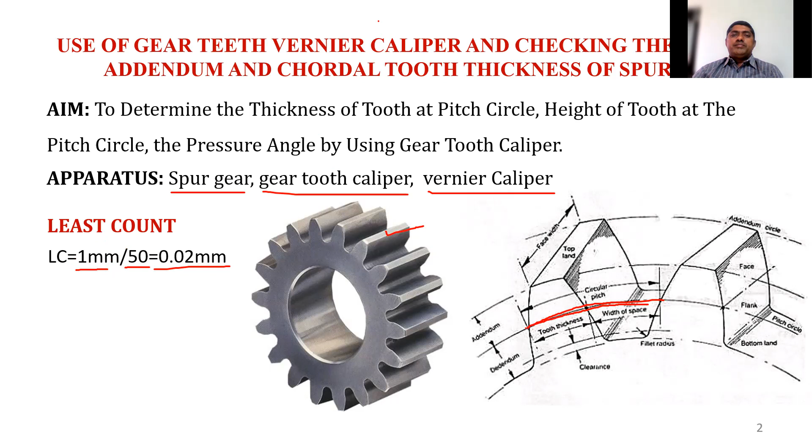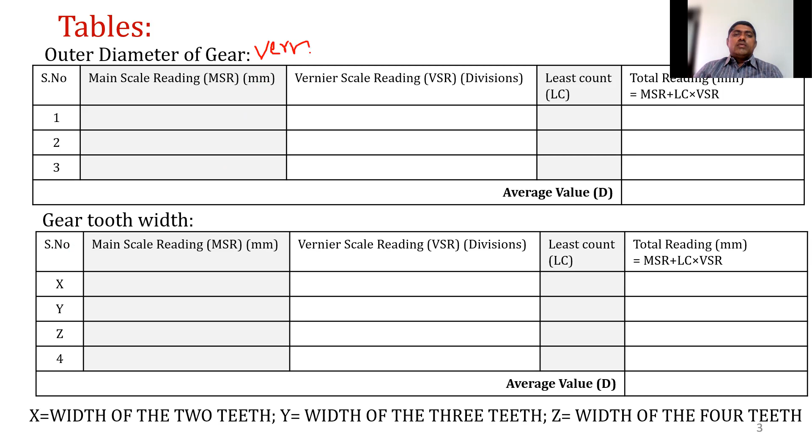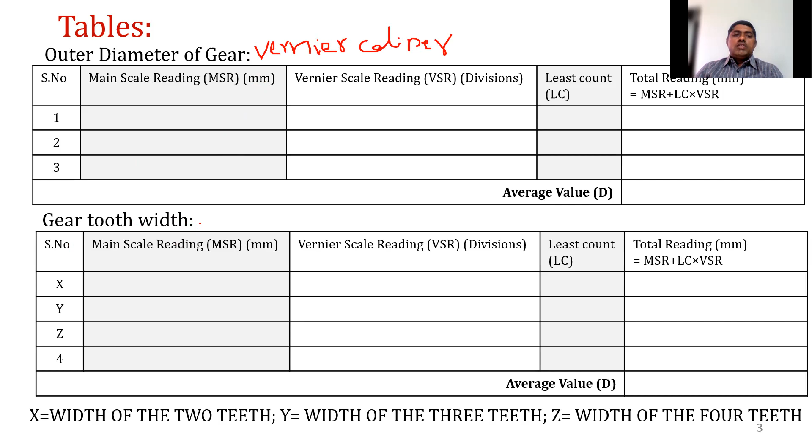So during the experiment, we need to note down the values for the outer diameter of the gear. This outer diameter of the gear is measured using the vernier caliper. And then we take the readings using the gear tooth vernier caliper for measuring the gear tooth width. So this is by gear tooth vernier.

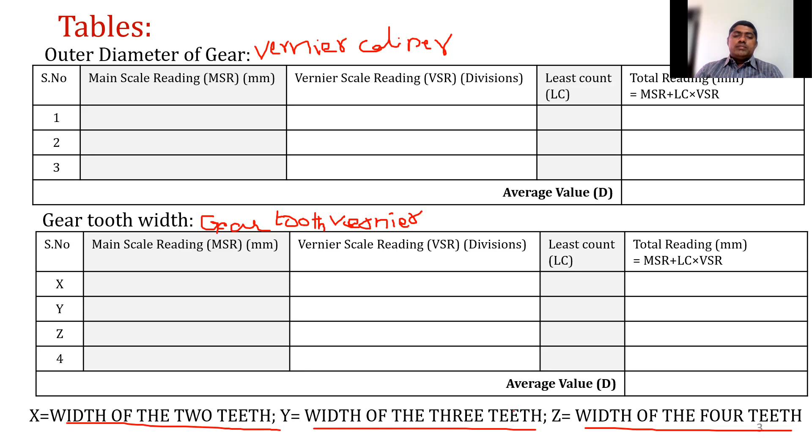So these two tables are used to measure the pressure angle of the gear. So in the gear tooth width, you can see X value, Y value and Z value. So here what is X? X is the width of 2 teeth, Y is the width of 3 teeth, Z is the width of 4 teeth. After that, we need to do the calculations for finding the module of the gear, that is outer diameter divided by n plus 2, where n is the number of teeth on the gear, and outer diameter is d.

So this number of teeth we can count on the gear, or on the gear it is printed. And we need to calculate what is base pitch. So from the second table, we have taken the measurements for X, Y and Z. By using the X, Y and Z values, we can calculate the base pitch. And then the base circle diameter is equal to number of teeth multiplied by base pitch, divided by pi.

So PB is the base pitch. Base pitch is measured at the base circle. And diametral pitch is equal to n plus 2 by d, where n is the number of teeth, d is the outer diameter of the gear. And pitch circle diameter we can calculate using n by PD, diametral pitch. So if you know the diametral pitch, by dividing the total number of teeth by the diametral pitch, you will get the pitch circle diameter.

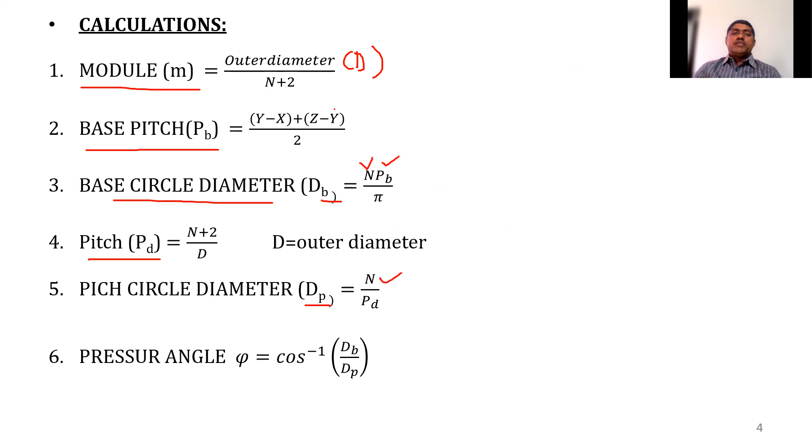Then the theoretical height of the teeth, h, that is chordal addendum. We use this formula: m into 1 plus n by 2 into 1 minus cos 90 by n, where m is the module of the gear. This is already calculated at the beginning. So this module we use here to calculate the chordal addendum, 1 plus n by 2 into 1 minus cos 90 by n.

And the chordal addendum is measured by gear tooth vernier caliper. This is the practical value of chordal addendum, and this is the theoretical value. And then we can calculate the error in measuring the chordal addendum using the same relation: practical value minus theoretical value divided by practical value multiplied by 100 gives the relative percentage.

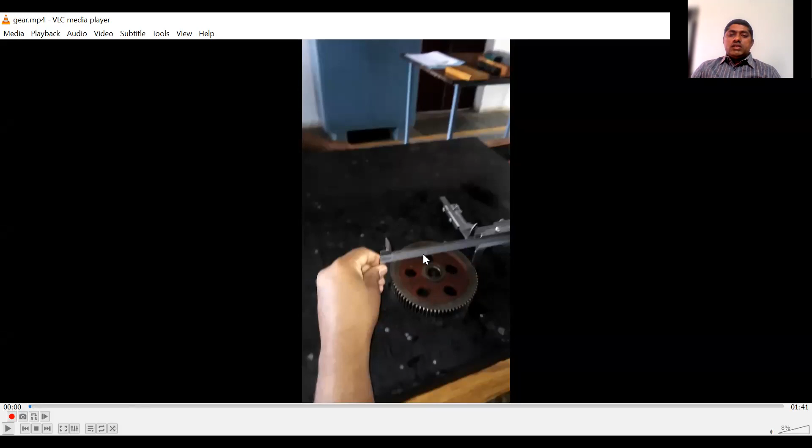Now let us see the video, how to take the outer diameter of the gear as well as the chordal tooth thickness and chordal height. For conducting the experiment, we need a gear wheel. So this is the gear wheel and this is the vernier caliper. Here you can see this is the gear tooth vernier caliper.

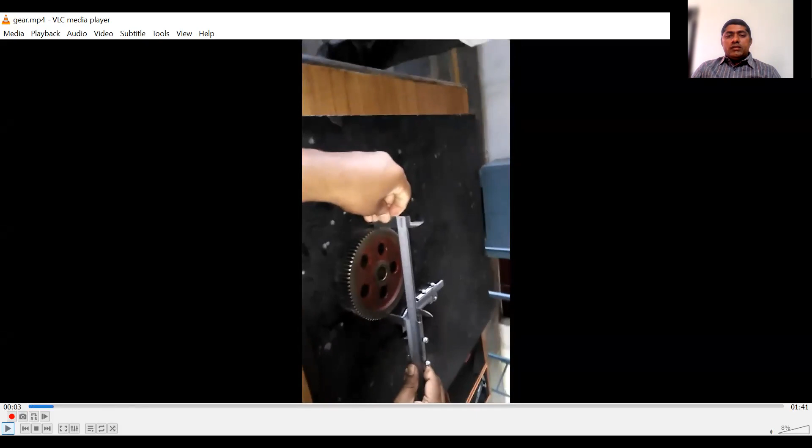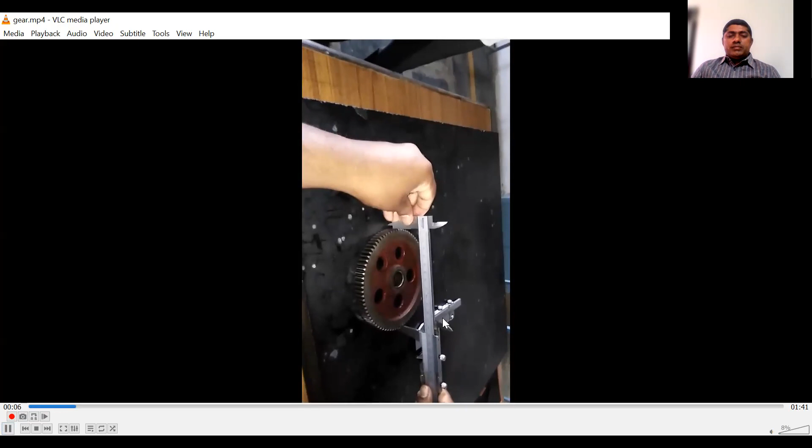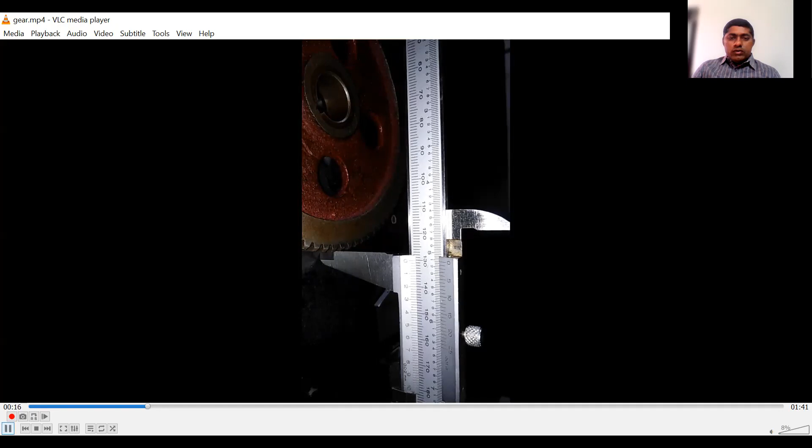For measuring the outer diameter of the gear, we use the vernier calipers. We keep the fixed jaw on one side of the gear teeth. Then the movable jaw is placed exactly opposite, on the opposite gear teeth. And then we take the measurement: the main scale reading and the vernier coincidence. Here you see the main scale is right in between 130 and 131, so the main scale reading is 130, and the vernier coincidence you can find right on the vernier scale.

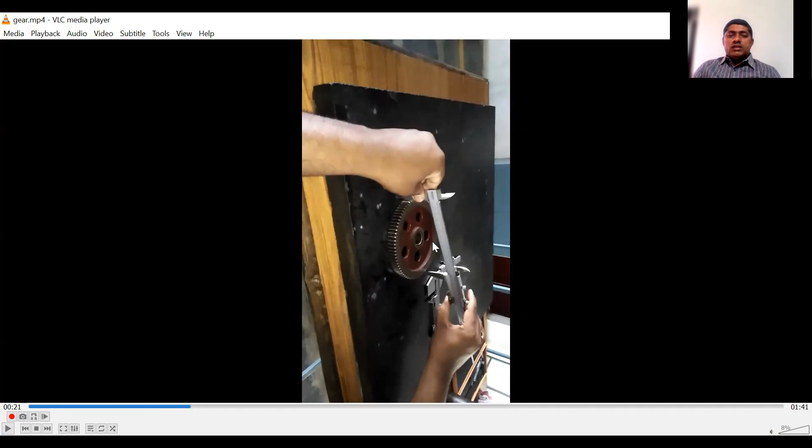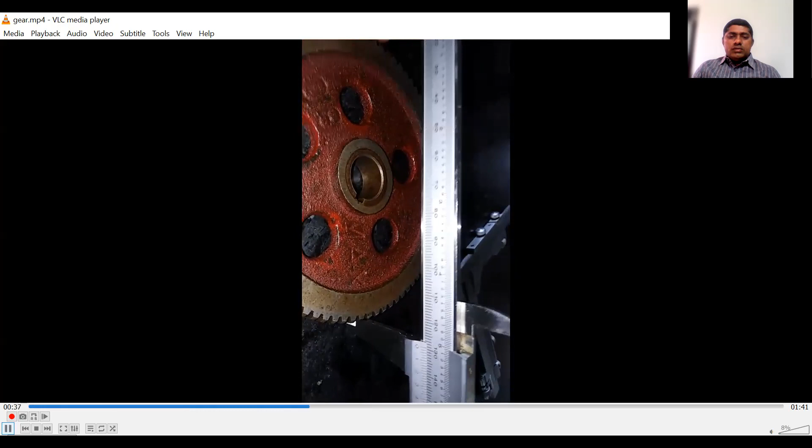And then you change the position of the vernier caliper to another position and again take the measurement. This procedure is repeated at 3 or 4 different places around the circumference of the gear. In this way we can measure the outer diameter of the gear.

So for measuring the outer diameter of the gear, we take the gear and, with the help of the vernier caliper, place the fixed jaw on one side and the movable jaw on the opposite teeth of the gear. Then we take the outer diameter of the gear, and again we change the position. Again we take the main scale reading and the vernier scale reading, and knowing the least count, you can calculate the total reading of the outer diameter of the gear.

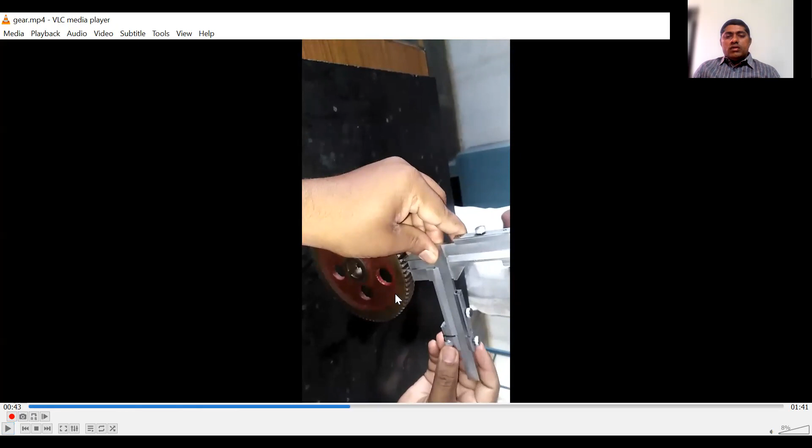Now for the second table, we need to measure the gear tooth width or thickness. For that we need to measure the X value, Y value and Z value. What is X? X is the width of two teeth. In this video you can see we have considered only two teeth. This is measured with the help of the gear tooth vernier caliper.

So we have two verniers. This is the vertical vernier and this is the horizontal vernier. The vertical vernier is used to measure the chordal depth and the horizontal vernier is used to measure the chordal tooth thickness. Here we are measuring the tooth thickness at the pitch point.

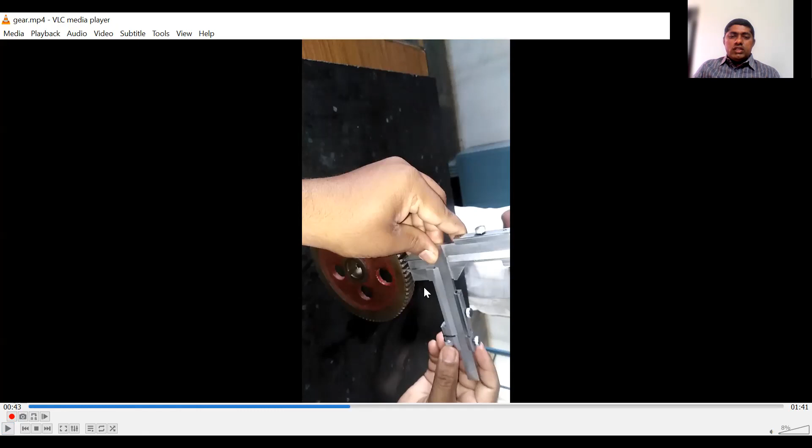In order to measure the tooth thickness, that is the X, Y and Z values, we use the horizontal vernier, because the width is changing for two teeth, three teeth and four teeth. So we use the horizontal vernier. The vertical vernier is constant.

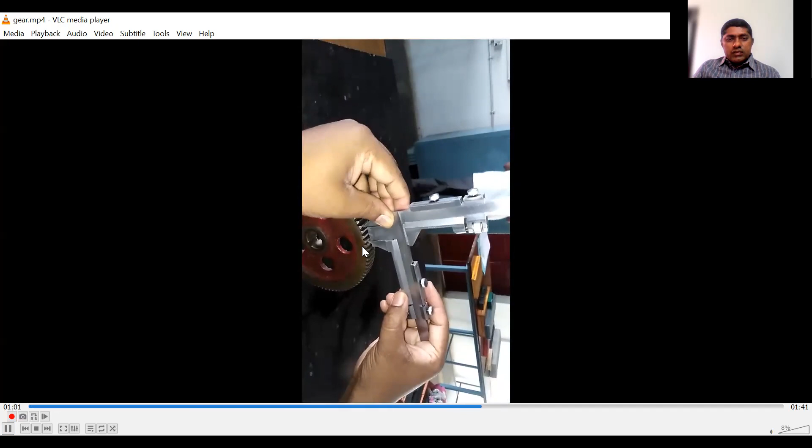Now we will change the position of the movable jaw on the third tooth. Okay, so in this case we consider only three teeth, 1, 2, 3, right? Similarly we take the measurement for the four teeth. Four teeth measurement is the Z value, three teeth measurement is the Y value, and two teeth measurement is the X value. So these X, Y and Z are used to measure the base pitch.

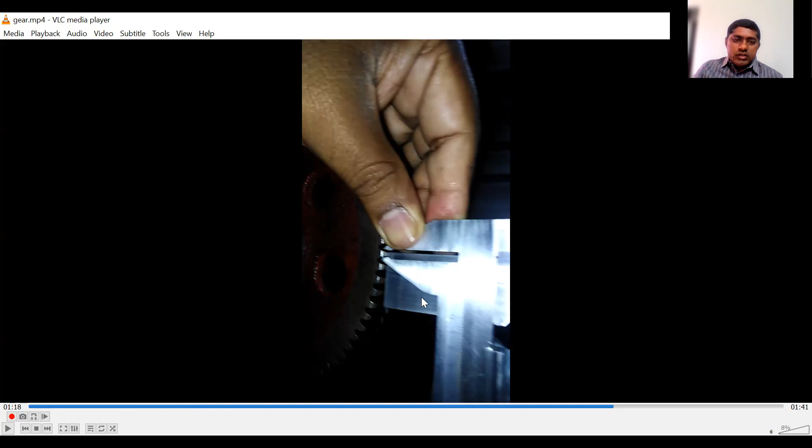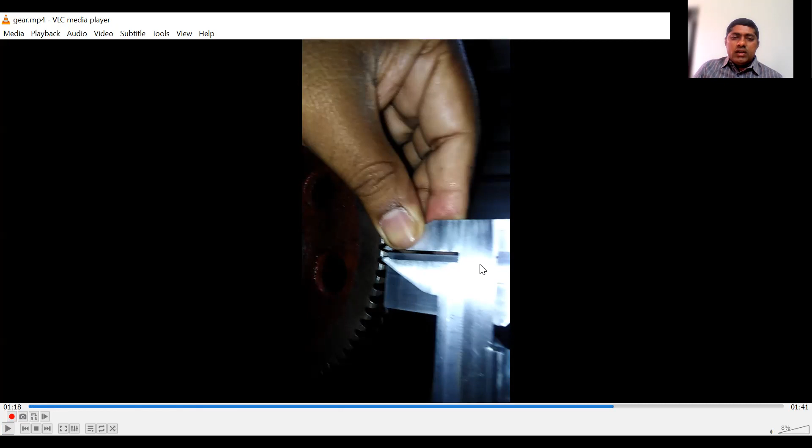And also practically we need to measure the chordal tooth thickness and chordal height. So where exactly do we measure the chordal tooth thickness or chordal height? If you observe here, exactly at this point, we need to measure. So what is the chordal tooth width and chordal addendum? For measuring the chordal addendum, you need to keep this tongue on the top of the tooth, and then you move the vernier exactly onto the pitch line.

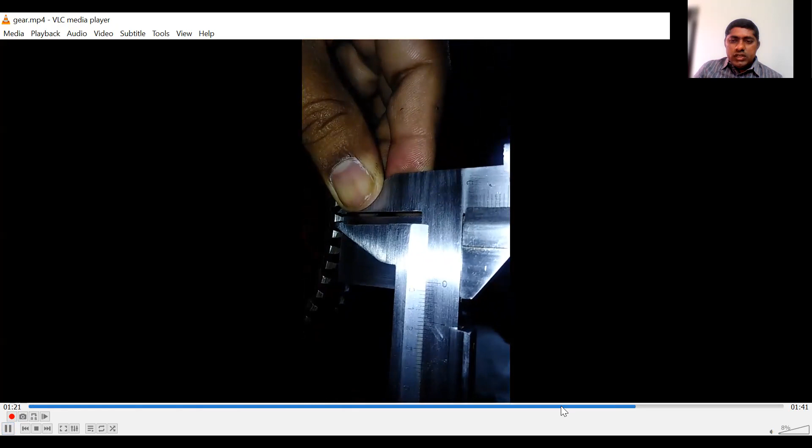Let us again see here. So we need to measure exactly at this point, right? Above this, the tooth thickness decreases. Below this, the tooth thickness increases, right? Exactly at this point, it is common for all the teeth. Observe here, it is observed as a circle. That is called the pitch circle, right?

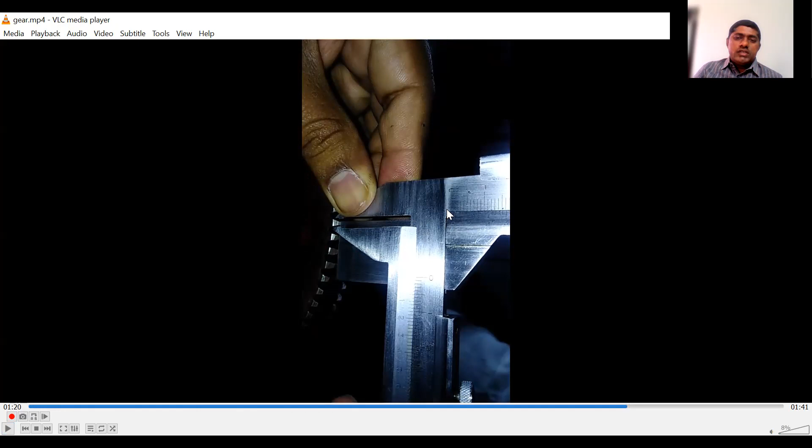At this pitch circle, we need to measure the chordal tooth thickness and the chordal addendum. Chordal addendum is the distance from this point to this tongue point, that is from the top of the tooth to the pitch circle, and it is measured on the vertical vernier. So this is the vertical vernier. You can observe the reading here. So here the chordal addendum: here 0 coincides, let us say 1 mm. And what is the vernier coincidence? We can see on the vertical vernier.

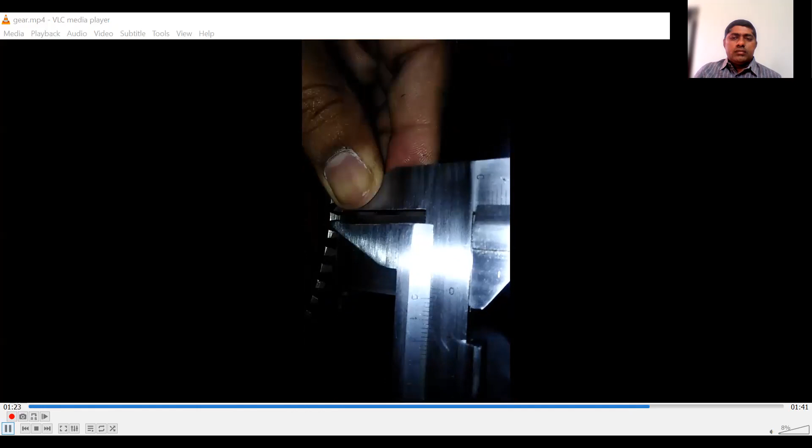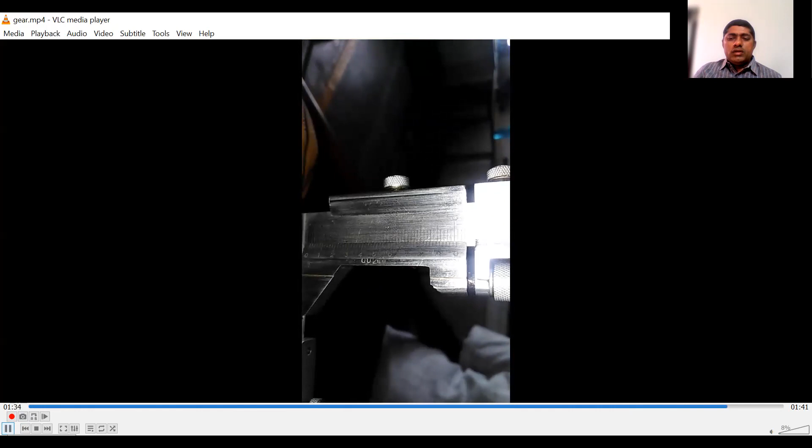So in this way, we can use the gear tooth vernier caliper for taking the measurements of the gear tooth, measuring the chordal tooth thickness, the chordal addendum and the X, Y and Z values. So after taking the measurements for the outer diameter, the X, Y and Z values for 2 teeth, 3 teeth and 4 teeth respectively, and the gear tooth thickness and chordal addendum at the pitch line, we have to calculate all these values from serial number 1 to 12.

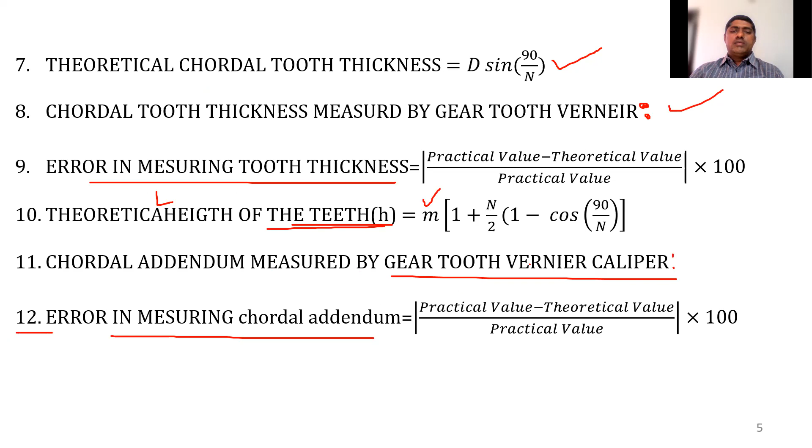Now we noted all the measured values in the tabular column. So what is the outer gear diameter? First reading: main scale reading is 130, and the vernier scale coincidence is the 10th division. Here the least count is 0.02. Therefore, the total reading is 130.20 mm. In the second reading, the main scale we observed is 130. After changing the position of the vernier caliper on the other teeth, the vernier scale division is 15. Therefore, the total reading is 130.3.

Again, we change the position of the vernier calipers on different gear teeth, and then measure the main scale reading and the vernier scale coincidence. In this case, it is 130 and 20. Therefore 130.40. So the average diameter of the gear is 130.3 mm.

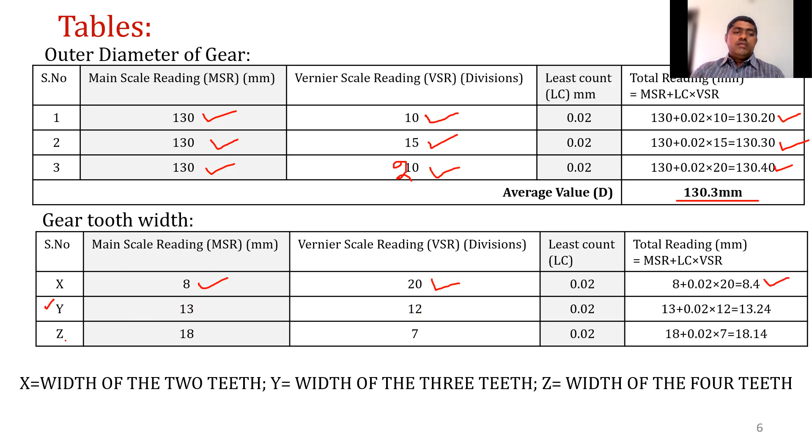And the gear tooth width. For 2 teeth width, the main scale reading is 8 mm and the vernier scale reading is the 20th division. Therefore, the total reading is 8.4 mm. For the 3 teeth width, the main scale reading is 13 and the vernier scale reading is 12. Therefore, the total reading is 13.24. Similarly, for the 4 teeth width, the main scale reading is 18 and the vernier scale reading is 7. So we get the total reading as 18.14.

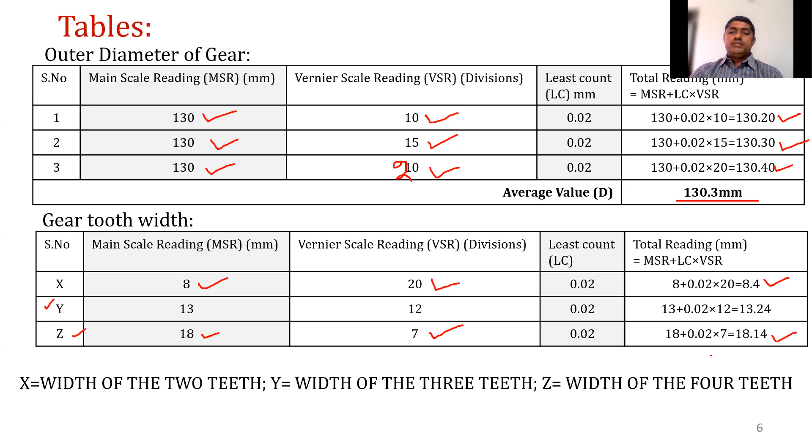So after tabulating the values and averaging the values, next we calculate the total parameters. So one is module. Module is equal to outer diameter divided by n plus 2. Outer diameter is 130.3 and the total number of teeth is equal to 80, which is printed on the gear, plus 2 is 82. So we'll get the module as 1.589 mm. And the base pitch is calculated by using the x, y

and z values. So here y is 13.24, x is 8.4. So this is 3 teeth and this is 2 teeth. So that means you will get only 1 teeth width. Similarly, z is 4 teeth and y is 3 teeth. So here also we'll get 1 teeth width. So this is 1 teeth width plus this is 1 teeth width divided by 2. We'll get only 1 teeth width, base pitch 4.87 mm.

Similarly, base circle diameter is equal to n into pb by pi. So here pb you calculated 4.87. N is number of teeth, that is 80, divided by pi. So you will get 124.01 mm. Similarly, diametral pitch is equal to n plus 2 by d. So by substituting n and d values here you will get 0.6293 mm. Therefore, pitch circle diameter is equal to n by pd. So here n is 80 divided by pd 0.6293. We will get 127.1219 mm.

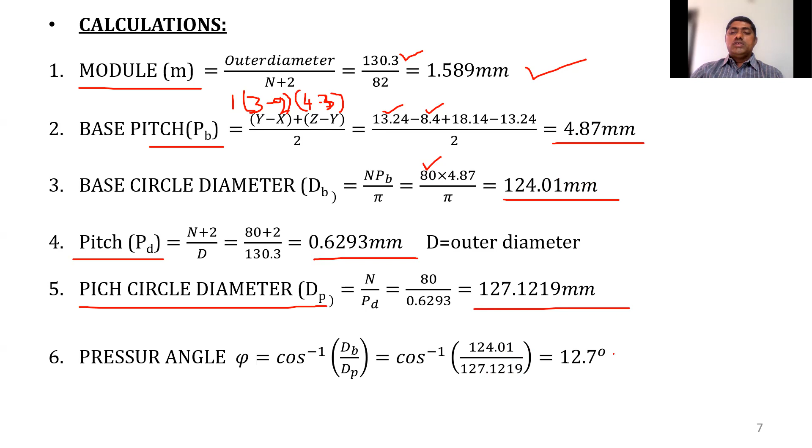Therefore, we can calculate the pressure angle phi is equal to cos inverse of db by dp. So db is equal to 124.01 and dp is equal to 127.1219. That is 12.7 degrees. And the theoretical value of chordal tooth thickness is equal to d sin 90 by n. So d value is 130.3 and in 90 by n, n is number of teeth 80. So you'll get 2.558 mm.

And the chordal tooth thickness measured by gear tooth vernier is taken directly from the gear tooth vernier caliper. This is taken on the horizontal vernier. So main scale reading is 2, vernier coincidence is 30, least count is 0.02. So we got 2.6 mm. So theoretical value is 2.558 mm and practical value is 2.6 mm, that is measured on the gear tooth vernier caliper. Therefore, you can calculate the percentage error in measuring the tooth thickness: practical value minus theoretical value divided by practical value. So it gives 1.61%.

Similarly, theoretical height of the teeth h is equal to m into 1 plus n by 2 into 1 minus cos 90 by n, where m is the module, that is 1.589 into 1 plus 80 by 2 into 1 minus cos 90 by n, that is 1.6 mm. And the practical value measured by the gear tooth vernier caliper is taken on the vertical vernier. So main scale reading is 1, vernier coincidence is 32, multiplied by its least count 0.02 mm, that is 1.64 mm. Therefore, the error in measuring the chordal addendum is 1.64 minus 1.6 divided by 1.64. So it is 2.4%.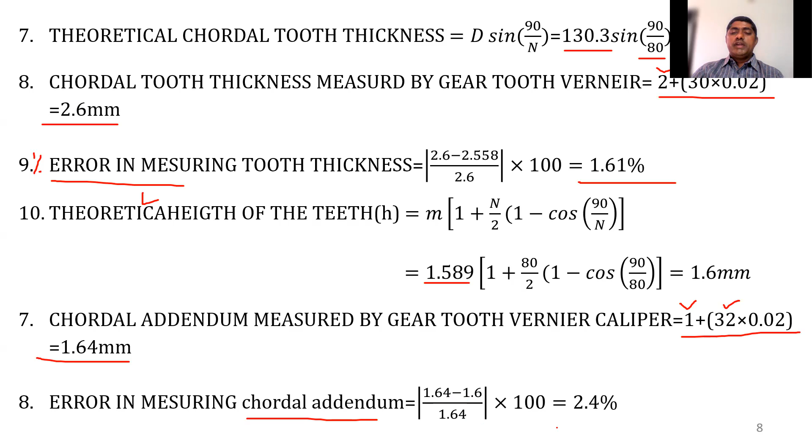Now coming to the results. So after measuring all the values, we need to report them under the results section. So the measured values of spur gear elements are: outer diameter we measured as 130.3 mm, module we calculated as 1.589 mm, and the pressure angle we calculated as 12.7 degrees. So normally it is 14.5 degrees for the spur gear. There is a slight variation in the pressure angle.

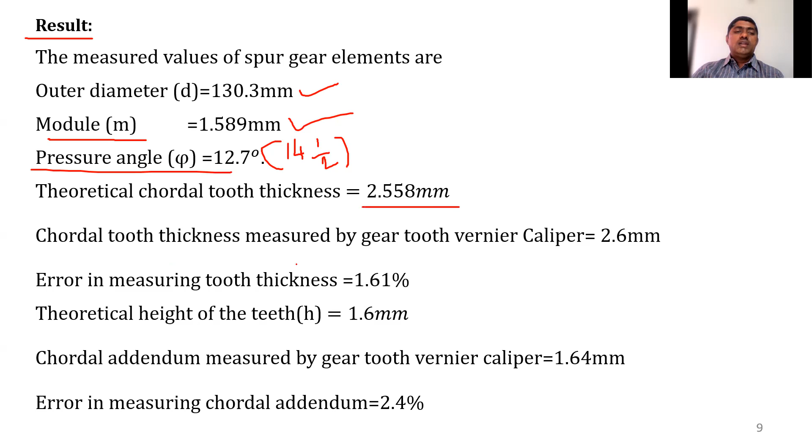And the theoretical chordal tooth thickness is 2.558 mm, which is theoretically calculated. And practically, measured by gear tooth vernier caliper, it is 2.6 mm. These two are very close to each other. And therefore the error in measuring the tooth thickness is only 1.61% from the practical value. And the theoretical height of the teeth is 1.6 mm, and what we measured with the gear tooth vernier caliper is 1.64 mm. It is slightly higher than the theoretical value. Therefore the error in chordal addendum is 2.4%.

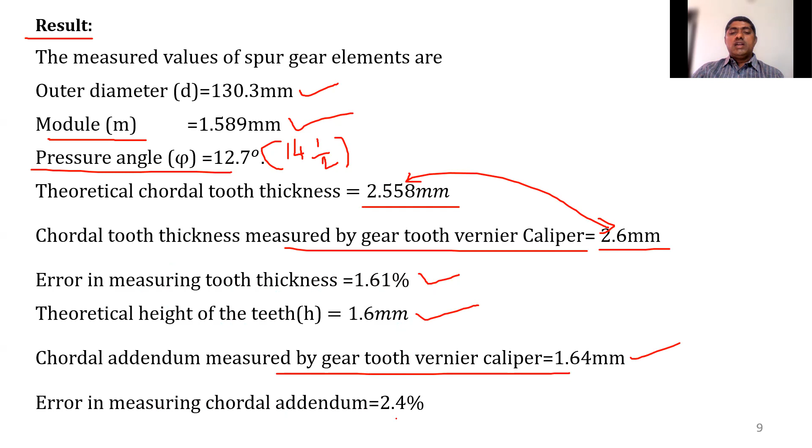So we need to draw the conclusion from the results. It is observed that the theoretical values and the practical values measured by gear tooth vernier caliper for spur gear are very close to each other, but there is a slight difference between them. So the chordal thickness error is generated due to improper process parameters and improper indexing during machining, and also machine vibrations and improper cutting tool angles cause the variation in the chordal tooth thickness error.

So coming to the applications, a gear tooth vernier caliper is used for checking the gears in gear manufacturing industries, measuring the hobs, or measuring the form and thread tools, etc. So in this way we need to conduct the experiment, calculate all the results and report them, and based on the results draw the conclusions and write the valid applications for the gear tooth vernier caliper. So this is about the gear tooth vernier caliper experiment for measuring the chordal tooth thickness and chordal addendum.